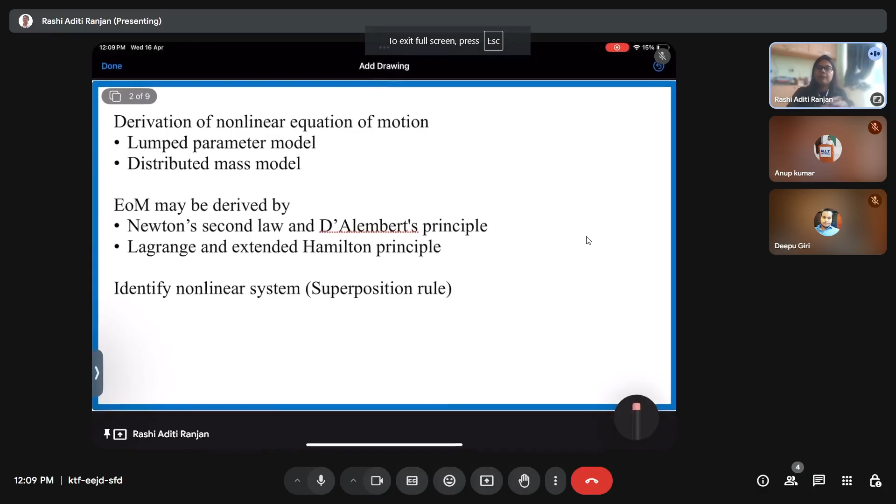We have a lumped parameter model and a distributed mass model. For a lumped parameter model, we mean that we take a system and divide it into some n number of lumped masses, springs and dashpots. And using that, we derive the equation of motion. So it has a finite number of masses, a finite number of springs and a finite number of dashpots, and so there is a finite number of natural frequencies in the system.

But in case of a distributed mass model, we consider our system as a continuous system, right? Wherein we consider the mass to be distributed continuously and uniformly, and then we derive the equation of motion. So when we are working with a distributed mass model, usually we have an infinite number of natural frequencies. Anyway, we can model a continuous system as a lumped parameter model or as a distributed mass model.

It depends only and only on us how and in what way my system is working. It depends upon the application of the system, how the system is working, and what final result we are expecting from the system, and then we can choose whether we should work with a lumped parameter model or the distributed mass model. Usually, when the application of my system does not require accurate dynamics, for example if I want it to be used as a ceiling fan, or something else where I don't require that much precision and accuracy, I can use the lumped parameter model.

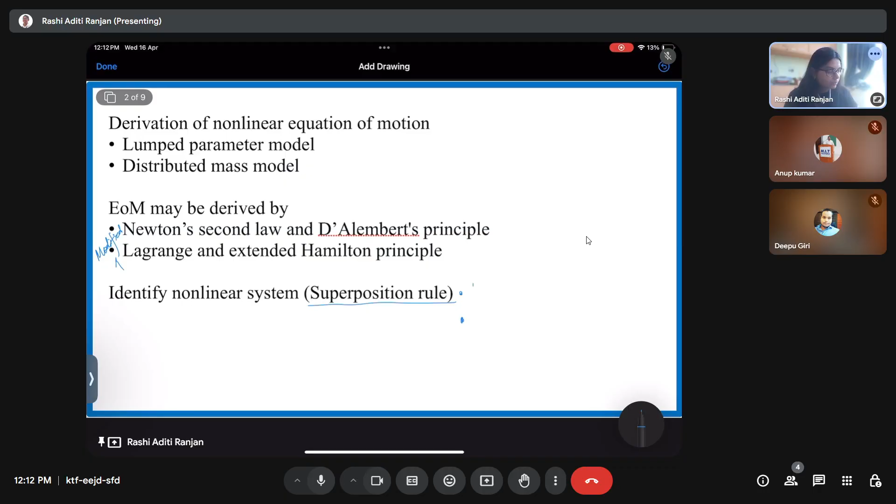One was the homogeneity rule, and the second one was the additive rule, wherein we had to check, for example, for the homogeneity rule, if I am replacing x with alpha x, then my function should be alpha f, right? And for the additive rule, it was like if I'm replacing my alpha x,

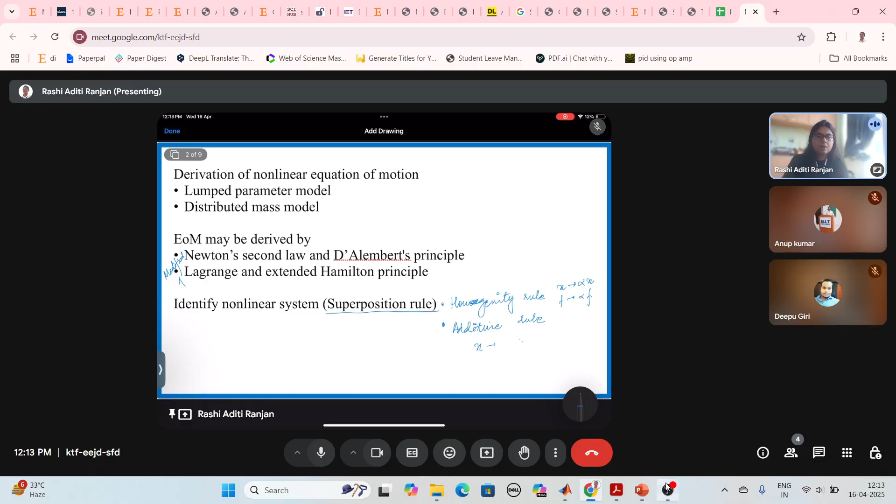Coming on to the additive rule, if I replace my x with x1 plus x2, then my function f1 plus f2 should be like f of x1 plus x2. It should be something like this. The additive rule should be applied and the homogeneity rule should be applied. And if this happens, then we say that our system satisfies the superposition rule and hence it's a linear system. While if it does not satisfy the superposition rule, then my system is essentially a non-linear system. Okay, I hope this is clear.

This is the very basic way of identifying whether my system is linear or non-linear. But once I keep on doing this practice, then it becomes easier for me to just look into the equation and then I can just say whether my equation is linear or non-linear.

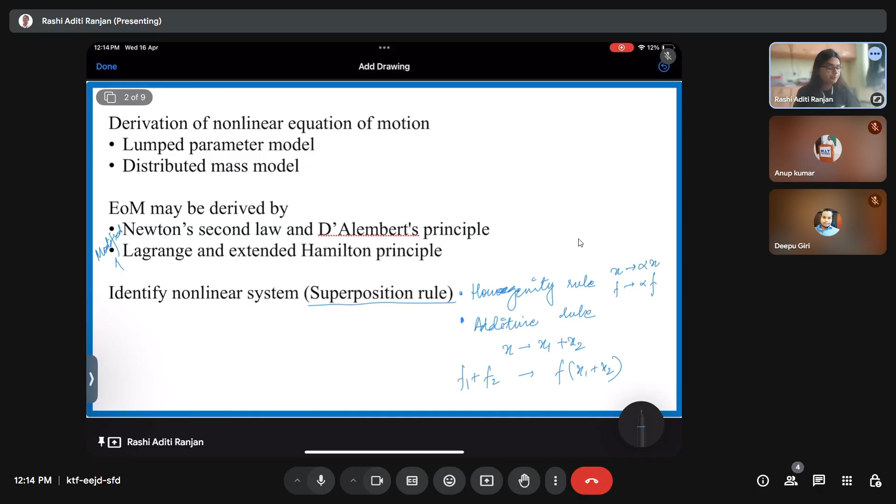Now, we come on to the stability analysis, wherein we were discussing the static characteristics of the system. So it was like, though my system is non-linear, it is definitely going to have some equilibrium points. Out of them, some could be stable, some could be unstable, right? Some could be center or whatever the possible cases are. So if I want to know what are the stability characteristics of my system, what will I do?

Now, when we talk about the stability analysis of a nonlinear system, there is no particular dedicated theory or rule that applies for a nonlinear system. That okay, if this rule is satisfied, then my system is stable, or the behavior is unstable. So what do we do? We apply whatever we have learned in the linear system analysis, and then we further use it to find the stability of my nonlinear system. So for the stability analysis, we have talked about finding the eigenvalues, right?

We have also discussed the graphical method in which we were plotting x dot with respect to x. For example, if this is x dot and this is x, and my behavior is something like this. So we discussed that here the velocity is positive, so the path is going to be like this. Here the velocity is negative, so the path is going to be like this. As we discussed, the path is going to be something like this. Here the path is going to be something like this.

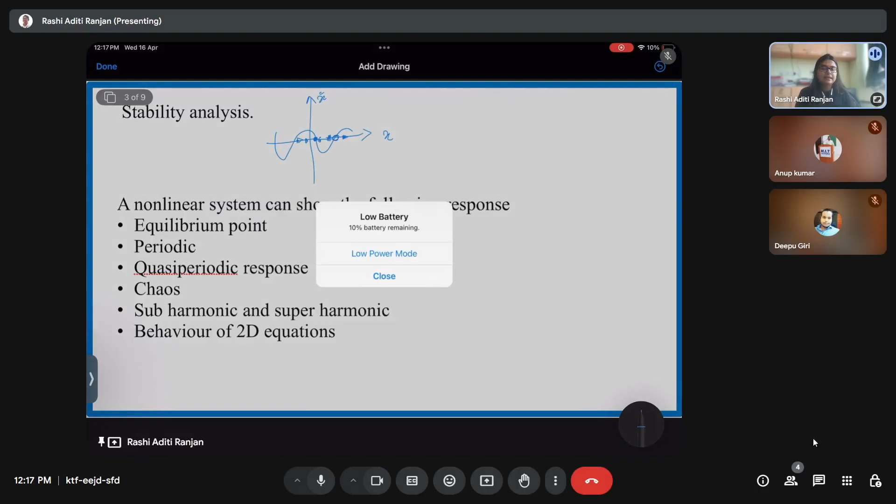and upon linearization we were putting the equilibrium points into the Jacobian matrix, and then when we found the eigenvalues of the Jacobian matrix, on the basis of the eigenvalues we could say whether my system is stable or unstable. Like if you remember, if the eigenvalues were all negative, we would say that the equilibrium point is stable. If the eigenvalues are all positive, the equilibrium point was unstable. If it was one positive, one negative, it was a saddle point.

Likewise, we discussed. Okay. So once we have talked about the stability analysis, the question is, in the case of a dynamic response, how is my system going to behave? Now, for a linear system, it could either converge to an equilibrium point. All right. For a linear system, what are the possible responses? It could have an equilibrium point, a periodic response, right?

But if I talk about a nonlinear system, there are various parameters that play a very important role. So if I talk about the response, there are different kinds of possible responses that I can see. First is definitely going to be an equilibrium point, because if my system is dissipative in nature, and I give it some kind of perturbation, it is going to converge to a particular equilibrium point, and definitely it is going to be a stable equilibrium point, right? So either it will converge to a stable equilibrium point, or it could diverge from an unstable equilibrium point, or if I'm starting the dynamics from the unstable equilibrium point without any perturbation, then it will stay at that point.

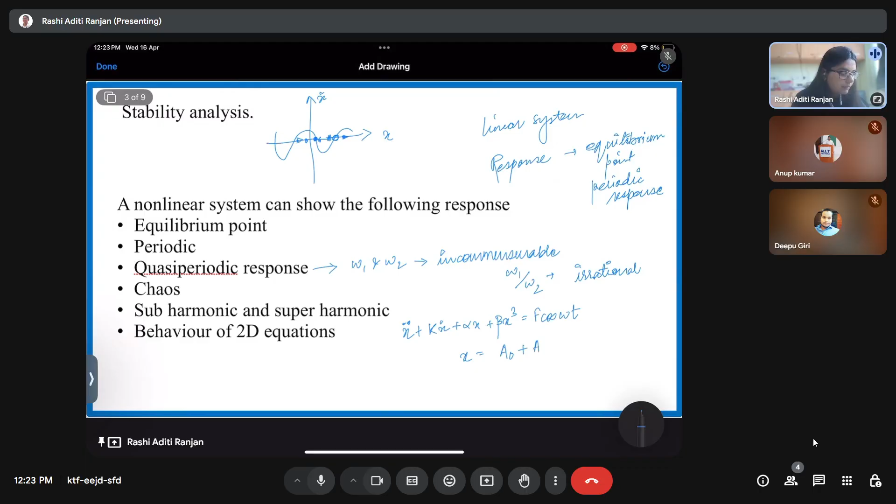For this equation, I assume x as a0 plus a1 cos lambda t plus a2 sine lambda t. Here I don't assume that lambda is already equivalent to omega. That I know for a linear system, but here I'll assume that it is not equal. If you put this in the main equation, you can compute x dot, x double dot and everything, and you'll get to know that the most obvious way is lambda equals omega, which is actually the harmonic response.

However, there are other possible ways. Now you see, since there is a cubic nonlinearity present, you are going to see that there could be terms of cos 3 lambda t, terms of sine 3 lambda t, and such types. So in that case, we are going to have an equality like n lambda equals omega, which implies lambda equals omega by n. Now this is known as the subharmonic response.

When your response frequency is some integer divided into the forcing frequency, it is known as a subharmonic response. In this case, your time period is going to be n times the original time period. Similarly, if you have lambda equal to n times omega, it is a case of a superharmonic response, and here the time period is going to be T naught by n.

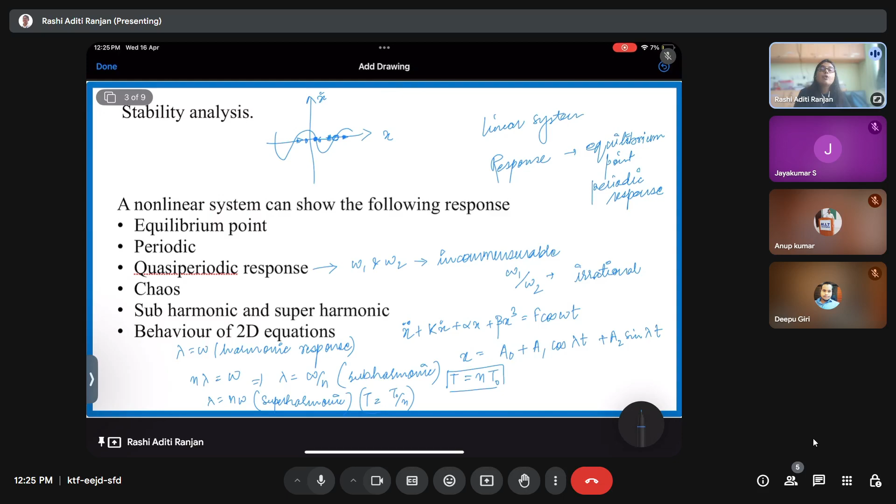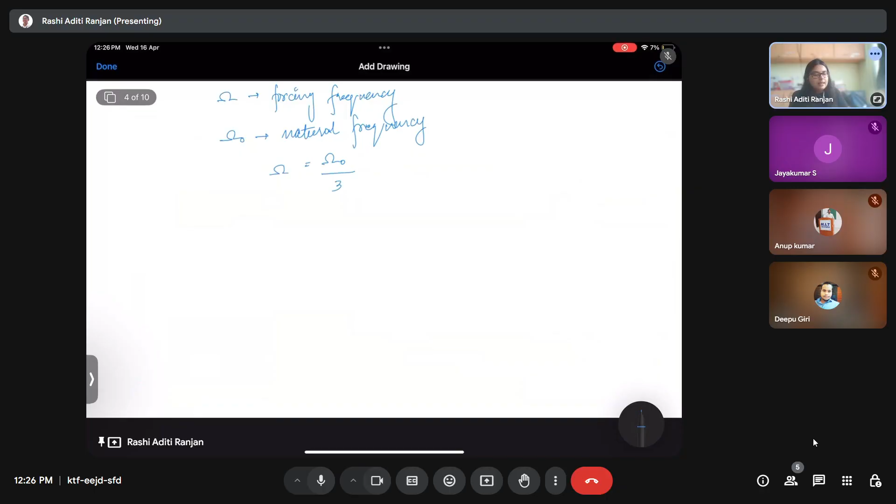Apart from this, if you are having a forced system, and your forcing frequency, for example, let me add another slide. You have this as your forcing frequency, and this is your natural frequency. Now if your forcing frequency is equal to 1/3 of your natural frequency, then this case is known as superharmonic. While if this is 3 times, then this case is known as subharmonic.

Now you see these two are actually different cases, because here we are relating the response frequency with the forcing frequency, while here we are relating the forcing frequency with the natural frequency of the system. So in this case, my time period is going to be, for the superharmonic, 3 times T naught, where T naught is the time period corresponding to the natural frequency of the system. While in case of subharmonic, the time period is going to be 1/3 of the time period corresponding to the natural frequency of the system. I hope this is clear.

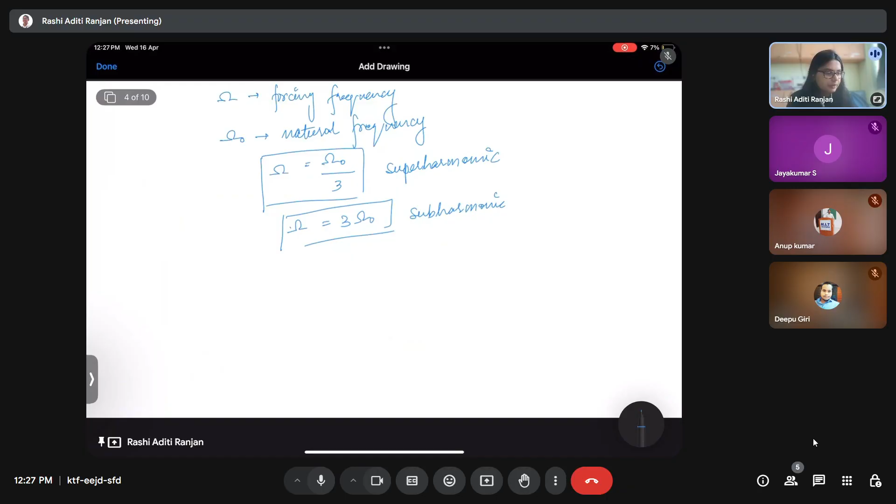Now we talk about the solution of differential equations. We are done with finding out the differential equations. But now, if we want to know what is going to be the solution of my, okay, just a second.

Charger hai. Subin, do you have a charger? Phone charger. Thank you. I'll give you some time. This iPad is not charged, it drains a lot of battery.

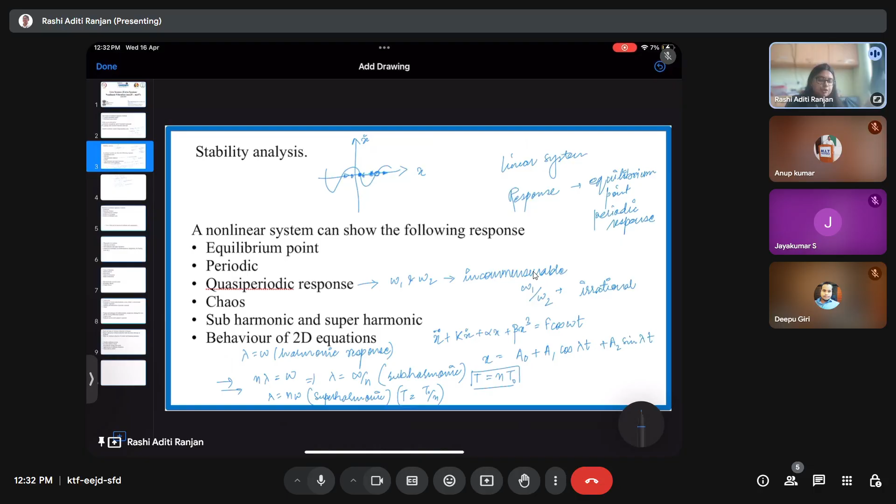Now, if you have studied these approximate analytical solutions well, you must have realized that these methods, though they are good for getting the solution, are not actually a reliable way, right? Because they can get me a solution only under certain assumptions. For example, if I assume that my steady state response is going to be periodic, then I can use any of these methods. Like for the harmonic balance method, we assumed a harmonic solution, that the solution is going to be of this format only. But is it true? In the transient state, is it true? No, definitely it isn't. So what do we do in that case?

In that case, we switch to the numerical method. However, if my system is to be used in a steady state, I can definitely rely on these approximate analytical solutions because they give me a very reliable closed form solution. Or if my oscillation amplitude is small, so that it could be covered in a linear zone or a slightly nonlinear zone, then we can use these approximate analytical methods. However, if my system is highly nonlinear and it is very difficult to obtain an approximate analytical solution, and I have to consider the transient response as well, then I would switch to a numerical method, right?

So for the numerical method, we have various ways, various numerical methods in order to find the solution of my system. Like we had ODE45 or the RK4 method. ODE45 is the inbuilt MATLAB function. We discussed the RK4 method, we discussed the Euler method, and we also discussed how the RK4 method is better than the Euler method, right? And so we came to know that numerical solution is a good way for us.

But then we also discussed an example wherein we saw that though the Euler method is a way of getting the solution, it could also give absurd solutions depending upon how much step size we are choosing. So the choice of step size plays a very important role, and it depends wholly on my nonlinear equation. If my nonlinear equation is stiff, then definitely the solution of my system would depend upon the choice of the step size, right? And for that, MATLAB again has a built-in function, which is ODE15s, which is used for specific stiff kinds of nonlinear equations.

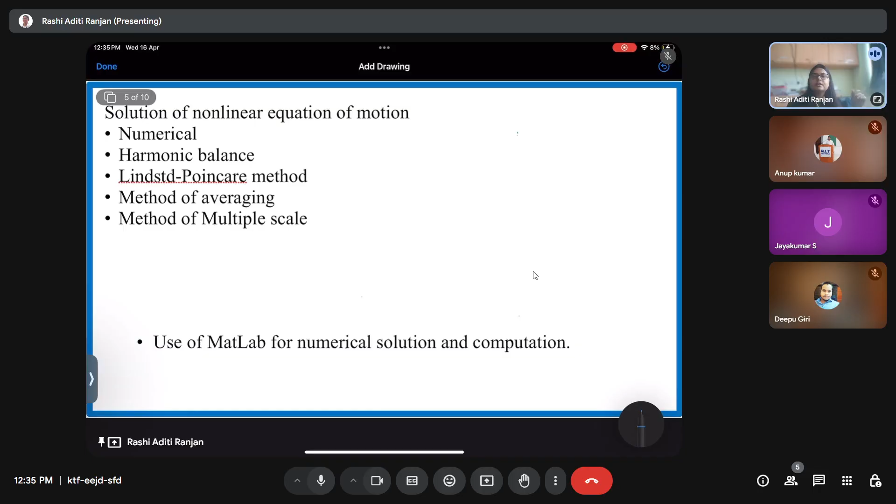Now, okay, I found out the solution, but then how to analyze it? So the first thing is we get the time response, wherein we plot my response with respect to time, right? Second is my phase plot, where I plot the displacement versus velocity, right?

So in that, I get to know some of the characteristics which I am not able to recognize in the time response. For example, if my response is periodic, I cannot exactly see it in the time response. Though in the time response maybe I can see that it is periodic, but when I plot the phase plot, I can see a very thick line, which shows that though the response seems periodic in the time response, in the phase plot it is not exactly periodic. It could be quasi-periodic.

And then if I have my chaotic response, then also I can see it in the phase plot. For example, in the periodic case we have a line, for the quasi-periodic we have a donut kind of shape which is filled in between. And for the chaotic response, we have a filled phase plot, right? So that way, the phase plot is essential in order to know the dynamic characteristics.

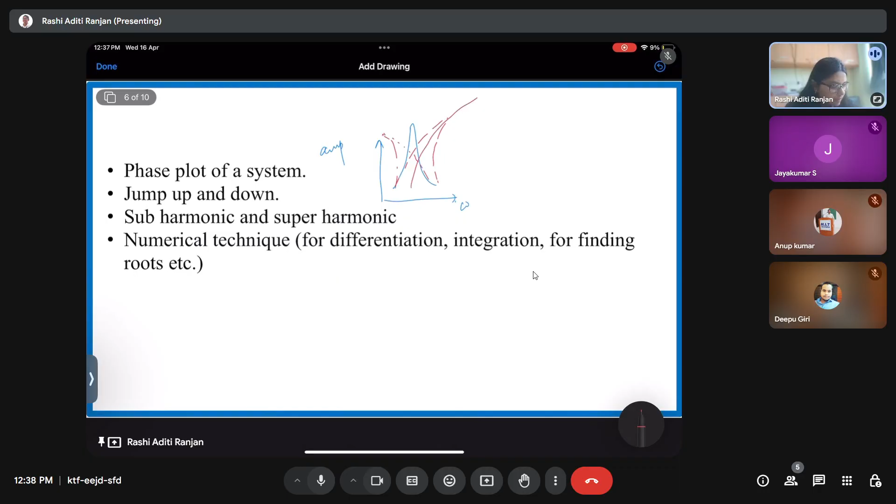But for the nonlinear system, this was not true. For the nonlinear system, we could see either a bend in this direction or a bend in this direction. Because of such a structure, we saw the jump up and jump down phenomena, right? With the frequency sweep, instead of following the actual path, it actually jumps down like this instead of following this path. Why? Because this is the unstable branch. We discussed yesterday that this branch is essentially an unstable branch, and at these 2 points a dynamic saddle node bifurcation is happening, right?

When we talk about the subharmonic and superharmonic response, we have already discussed what a subharmonic and superharmonic response is, depending upon how I relate the frequency of oscillation with the forcing frequency, and how I relate the frequency of my forcing function with the natural frequency of the system.

Okay. Then we also discussed the numerical techniques which could be useful for differentiation, integration, and finding the roots. For integration, we exactly know the use of a numerical method, which is our RK4 method for solving ODEs. What are we doing? We're actually integrating with respect to time only, no? Then there is the integration function also, int, which could be used in order to integrate with respect to a particular variable only. For differentiation also we can use it, and for finding the roots, which is also one of the important things for us, because

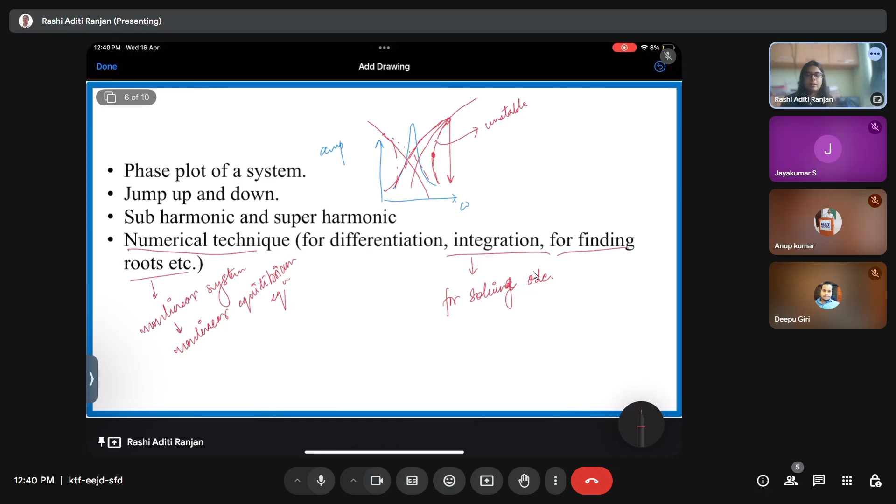Then coming on to the types of damping, we saw that there was Rayleigh damping, Coulomb damping, right? Then we had friction, and these kinds of damping could be present in the system. And then we came to know that for a nonlinear system we could have viscoelastic behavior, wherein there was an amalgamation of the elastic plus the viscous behavior, right?

Then we studied modal analysis. In modal analysis, what were we doing? We were decoupling the equation for a multiple degree of freedom system, right? We were decoupling the equation because we were getting the different frequencies that were present in the system. Like for a single spring mass system, we know that the frequency is going to be under root k by m.

But if I have a two spring mass system, the frequencies are not going to be square root of k by m for both of them. It will be different. As I remember, one would be square root of 2k by m, and one will be square root of k by 2m, right? And if we use these frequencies, we can actually get the eigen directions.

And if I get the eigen directions, then if you remember, we used a concept of how to find out the stability for a 2 degree of freedom system, where we came to know that if I get two independent solutions, then I can write the other solution as a linear combination of both. So modal analysis is essentially important in order to find out the exact solution.

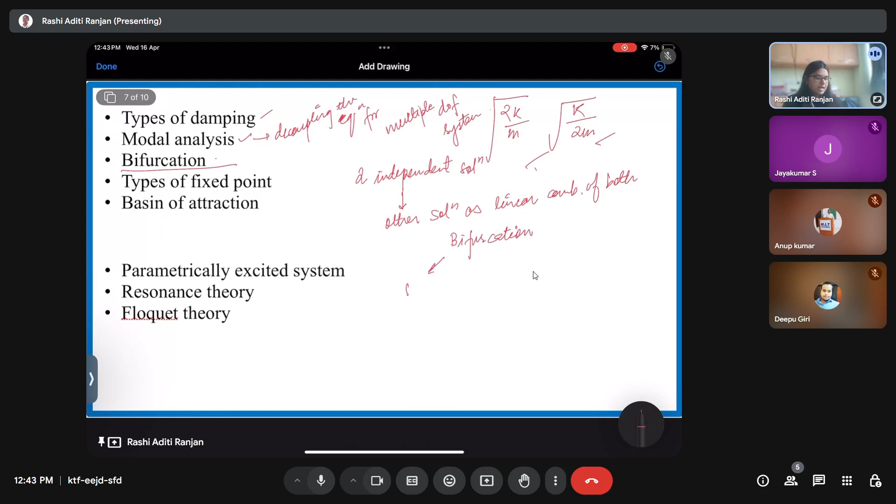So bifurcation was all about that. And if I talk about bifurcation, there was static, there was dynamic. We had SN bifurcation, we had pitchfork bifurcation, then we had transcritical bifurcation, right? In pitchfork, we had subcritical and supercritical pitchfork bifurcations. Apart from that, we have also seen the period doubling bifurcation, wherein the time period was actually getting doubled. Then we had Hopf bifurcation, right? And these were the types of bifurcation we discussed. And anyways, this SN, pitchfork, and transcritical bifurcation, they were there for the static as well as the dynamic cases.

Okay. So bifurcation actually took a lot of time. Bifurcation is one of the very important things in case of a nonlinear system, because it is very essential for us to know how our system dynamics is changing with respect to a particular parameter. And bifurcation is happening in case of a nonlinear system because of the non-monotonic response. Right, because in case of a monotonic response, there could be an equilibrium point which would either increase with increase of the parameter, or just decrease with the increase of parameter. But in case of a nonlinear system, the number of equilibrium points are changing with the parameter change. The stability of the equilibrium point is changing with the change of parameter. The type of bifurcation is changing with respect to the change of parameter. So that is because of the non-monotonic response, and this is one of the very important characteristics of a nonlinear system, right?

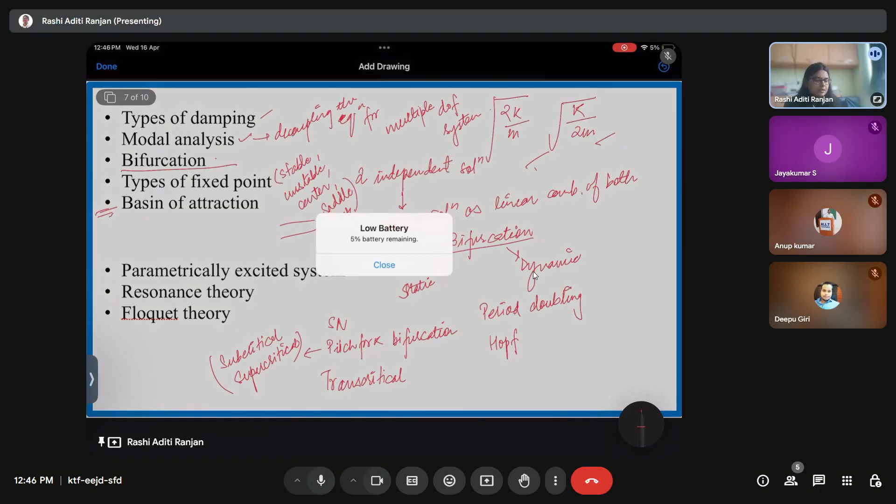Then we discussed about the basin of attraction. We discussed it in the last week's live session only. So I hope this is clear. We don't have to discuss about the basin of attraction again.

Then we talked about a parametrically excited system. We had an externally excited system, like in case of a spring mass system with a forcing present in it. What was essentially happening there was that we had a forcing function which was externally providing a force to my system, right? But in case of a parametrically excited system, like the example which was discussed in your classes, which was that of a beam, the forcing was in one direction, but your movement was in the lateral direction, right?

Because of that lateral direction, it was actually a parametrically excited system. Now, that is a different case. What if I talk about a soft material, like we discussed about a pneumatic artificial muscle yesterday? In case of a pneumatic artificial muscle, we got to know that the stiffness of my material actually depends on the air pressure that is inside that pneumatic artificial muscle.

Now, if that air pressure is varied with respect to time in a sinusoidal or cos function way, then it is a parametrically excited system. Because in a parametrically excited system, essentially the parameter is varied with time and it shows a periodic nature. Then we say that it's a parametrically excited system. So for a pneumatic artificial muscle, if the air pressure is given in a sinusoidal way, then it's a parametrically excited system.

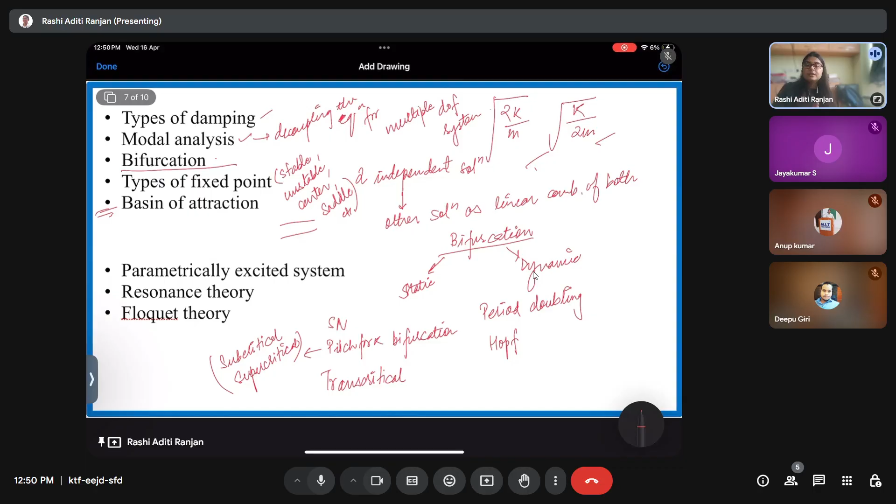Then we also discussed one of the very important things that we talk about in case of a nonlinear system, which is a limit cycle. If you remember, for a spring mass system, if I have a periodic response, like if I have a spring and a mass attached to it, and I give some perturbation, my mass is going to oscillate with some amplitude and frequency. The frequency is definitely going to be the natural frequency of the system, and the amplitude will depend upon what initial condition I'm giving. If I change the initial condition by a small or a large amount, the amplitude is going to change, but the frequency is going to be the same. So that is a periodic response.

But then what is a limit cycle? A limit cycle is essentially an isolated periodic orbit. In case of a spring mass system, there were multiple periodic orbits; it was not isolated. When I say isolated periodic orbit, in the phase plane I have only one stable periodic orbit. So no matter what initial condition is given to the system, it will always converge to that one isolated periodic orbit.

So, essentially, it's a stable periodic orbit. In the case of a spring mass system, the periodic orbit is neutrally stable, right? Neither is my system going to converge, nor is it going to diverge. If I change the initial condition, it is not going to follow that path again. While in the case of a limit cycle, it's a stable, isolated periodic orbit, right? So if such a limit cycle is present, then how do we deal with it?

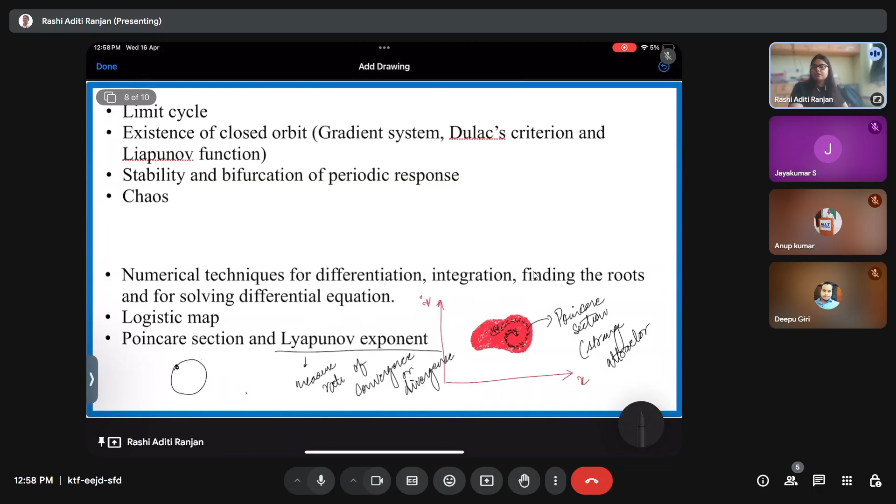And then we have the Lyapunov exponent, which is essentially used to measure the rate of convergence or divergence. So if my Lyapunov exponent is positive, I say that my response is chaotic. If it is negative, I say that my response is non-chaotic. Now, we only discussed graphical tools to find out the behavior of chaos, but we should have a quantitative value to characterize chaotic and non-chaotic responses, and that is what the Lyapunov exponent does.

And coming to what we discussed in the last 3 weeks of lectures, it was vibration reduction techniques and why vibration absorbers or vibration reduction techniques are required, right? We discussed that if a machine is operating in a factory and has some kind of vibration, which may be because of the eccentricity of the mass present in the system or any other reason, then that vibration needs to be reduced or absorbed, because it can actually affect my system as well.

It can cause the transfer of the vibration onto the floor. It could cause problems to the sensors that are present on the machine, and it definitely reduces the efficiency as well. So vibration reduction and vibration absorber techniques were discussed, which could be useful to reduce the effect of vibration in order to increase the efficiency of my system. And usually flexible materials like rubber are used to get the vibration reduction or absorption.

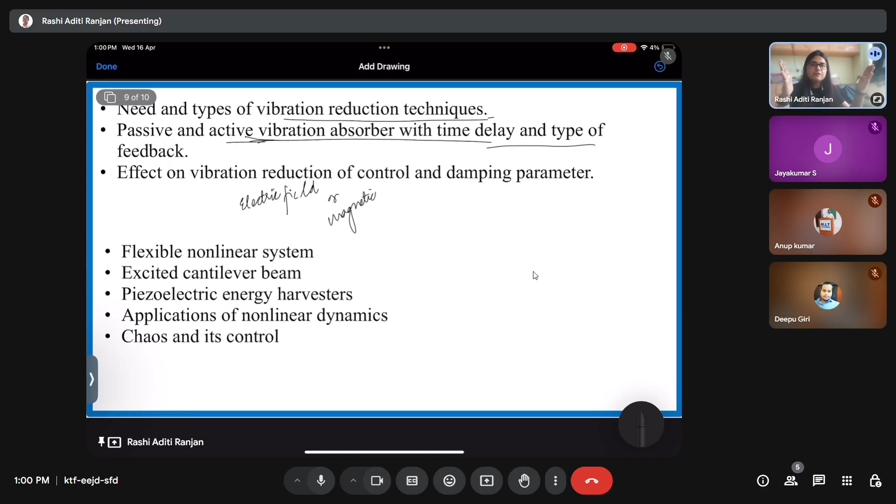And then we discussed electroactive polymers or MR based elastomers that could be used for the active control of the vibration absorber, right? Because there, by changing the electric field or the magnetic field, we can change the properties, or the shape and size of my system. I can change the stiffness of my system. I can change the viscosity of my system. So that would help us increase the range in which the particular absorber that I have designed could work, right? So that is what we discussed.

And since these MR elastomers and electroactive polymers are essentially flexible materials, they need to be governed by nonlinear dynamics. Then we had flexible nonlinear systems. Then we had excited cantilever beams and piezoelectric energy harvesters, applications of nonlinear dynamics, and then we talked about chaos and its control. So for the flexible system, what did we do? We discussed how we can use the flexible system for different kinds of applications.

Like it was discussed how it could be used for energy harvesters, wherein we could have a cantilever beam which is fixed at one end, and if we apply a piezoelectric sensor over here, then due to the rotation of this cantilever beam, the piezoelectric effect, if there is a change of the dimension of my piezoelectric material, it will cause the generation of voltage across it, and that voltage could then be taken in and used for energy generation, right?

Then we talked about an application of nonlinear dynamics, specifically in the case of a manufacturing process, where we had chattering, which is unwanted vibration in the manufacturing process, like in rolling or milling, right? That chattering was happening due to many reasons, like problems with the fixtures, inaccurate readings, and tool wear, and it could further lead to tool wear.

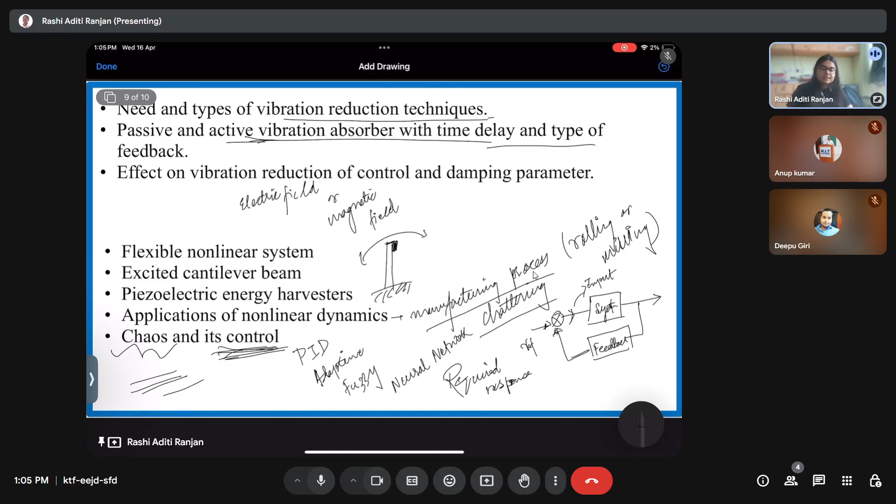So you see, in this course, what we have studied is how do I get a nonlinear system? How do we derive the nonlinear system? How do we check whether the system is linear or nonlinear? Once I get a nonlinear system, how do I find its solution? What are its characteristics? What are going to be its steady state characteristics, like the number of equilibrium points, and then what is going to be the stability of the equilibrium point, and how do we find out the basin of attraction. And for the dynamic cases, we discussed what are the possible responses that can happen in a nonlinear system. Once I get a probable response, how do I know whether the response is chaotic or non-chaotic by using the Poincare map or the Lyapunov exponent?

And once I get those, how can I use my nonlinear system for different kinds of applications, like for a manufacturing process, for energy harvesting, for vibration reduction techniques? And then if I have chaos, how do I try to control it? Because you see, chaos is inevitable in the case of a nonlinear system. It is definitely going to happen in a system in any way. So if the chaos is present inside the system, then how do we actually reduce the chaos, or how do we keep my system from going into the chaotic response.

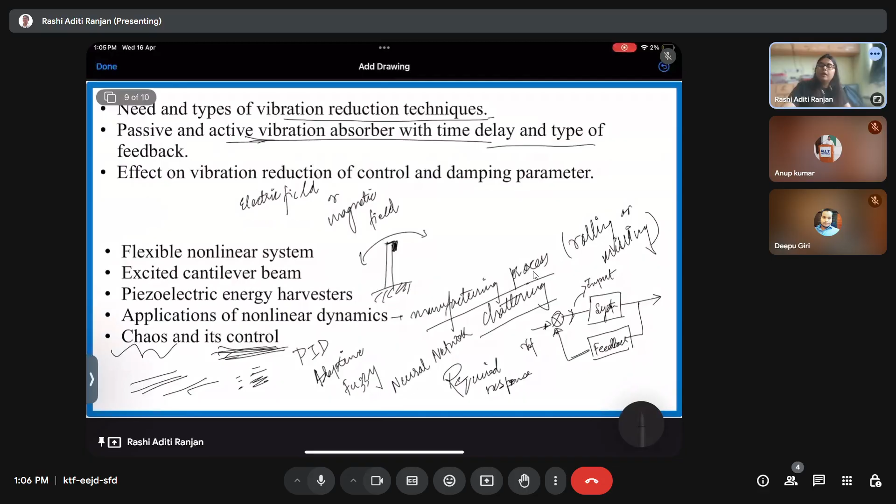And this was it for the live sessions for the course nonlinear vibration. And we are already done with it. And I hope that this course was able to make you interested in nonlinear vibrations, how nonlinear vibrations are happening, how we can actually work on nonlinear vibrations and everything, and how we actually deal with a nonlinear system.